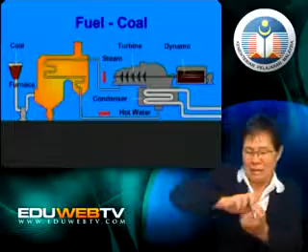During this process, the heat that is given out will heat up the air and produce steam. The steam causes the turbines to turn, resulting in the rotation of the generator. The coal that has been finely ground is full of chemical energy. So, when it is placed in the furnace to be burned, it releases heat energy.

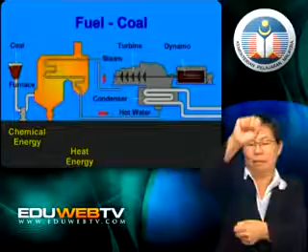The heat energy will heat up the water in the pipes until it turns to steam. Steam has potential energy and is able to rotate the turbines. When the turbines begin to turn, they produce kinetic energy, which gets the generator going to produce electricity.

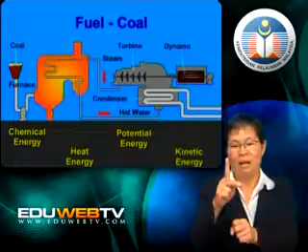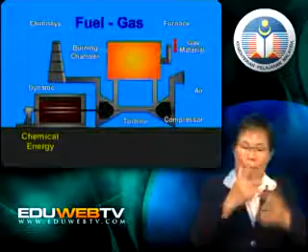Gas, which has chemical energy, is then sprayed into the burning chamber. The rotating compressor sucks in air through the openings. The air is then compressed and pumped into the burning chamber. The mixture of fuel and air burns and produces energy.

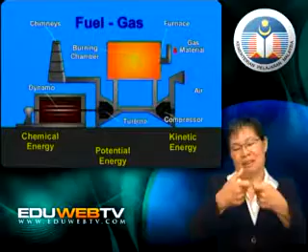The hot gas expands and the potential energy that is released turns the turbines. When the turbines rotate, they produce kinetic energy, which is needed to rotate the generator to produce electricity. You know, whenever something is burned, it leaves behind waste products. And that also happens here at the Sultan Salahuddin Abdul Aziz Electrical Power Station.

So, what is left behind? Well, there's smoke and coal dust. And how does the station deal with the smoke? Well, the smoke is first filtered to reduce pollutants and is then expelled through very tall chimneys about 175 meters high. Ooh, that is really tall.

And the dust? Well, it's collected and taken to a storage container, and then it is sold. To whom? To factories that make cement. And when this dust is mixed with lime and clay, we get cement powder that is of a higher and better quality.

The ash pond? What happens there? Oh yes, the water that overflows from the ash pond is directed out to the deep blue sea. Don't worry about it. It is clean and will not pollute the sea.

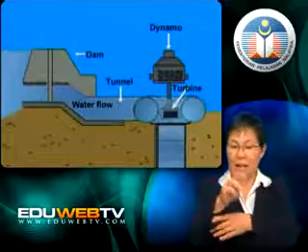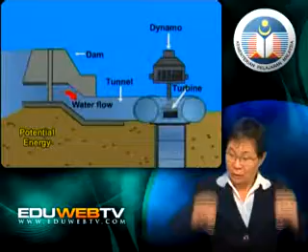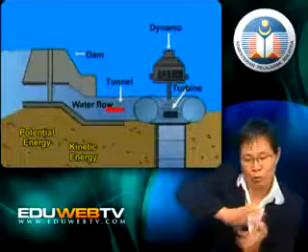The water that is collected in the dam has potential energy that will change to kinetic energy when it is pumped through the tunnels to the power station. The energy from the water will rotate the turbines and generate kinetic energy, which will cause the generator to rotate to produce electricity. Phew, simple, isn't it?

So, where does the electricity go once it has been produced? To the surface, of course. Yep, that's right. From the transformer to the cables and whoosh to the surface. And then what? Well, it is channeled to an area called the switch zone. The switch zone, in turn, sends the high voltage supply of electricity through high tension cables that are hooked to very high towers. We call these towers pylons.

These giant structures form a network across the country and is called the National Grid Network. It is these national grid networks that distribute electricity to the whole country. And that's how you, yes, you, get electricity at home.

Coming back to power stations. Did you know that most thermal or hydroelectric power stations generate alternating currents at 20 kilovolts?

Of course you didn't know that. You're not supposed to know that, because if you did, I'd be out of a job.